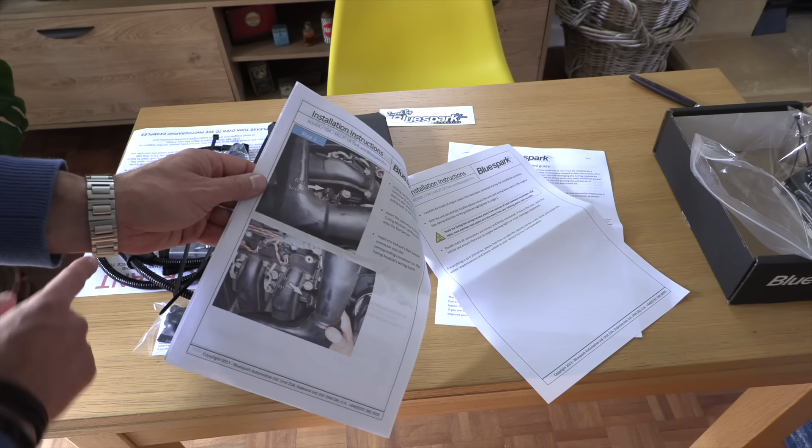Then there's also a nice sticker there. So the instructions seem pretty clear really - you just got to take off a plastic shield on top of the engine where the air intake is, and then that exposes the plug to the rail sensor, and then you splice in the unit into that. So it should be relatively quick and straightforward.

This is the tuning unit itself, the chip, whatever you want to call it. You've got the connector there, and I think the whole thing stays in the engine bay and is secured with those tie wraps. Would have been useful if they put a picture of the unit actually installed in the engine, but they haven't done that. The tuning module itself looks really well made - looks like that's aluminium, slightly milled as a heat sink, all nicely put together.

You can tune this, so you can have it biased towards more power or more fuel economy. In theory, it should bring both, depending on how far you go one way or the other. It is currently in its middle setting. To change that, you have to open it up and then move a little plug. There's instructions for that as well.

I'm going to keep it in that middle setting, which is supposed to be the sweet spot for more economy and more power. There are cheaper modules on eBay, but obviously you can see this is very well thought out, and the feedback I've seen is that these are decent products. It also comes with a little pouch, which I think is to keep the unit in and protect it a little bit when you strap it inside the engine bay.

Right everybody, it's time to see if this is going to work or not. So I am in Brize Norton at the pit stop. They've got a rolling road. The guys generally do classic cars, tuning and stuff like that, and work on them generally. We're going to do a run, first of all, without the tuning module. Then I'm going to fit the tuning module and see what difference it makes. So first of all, the run without the module.

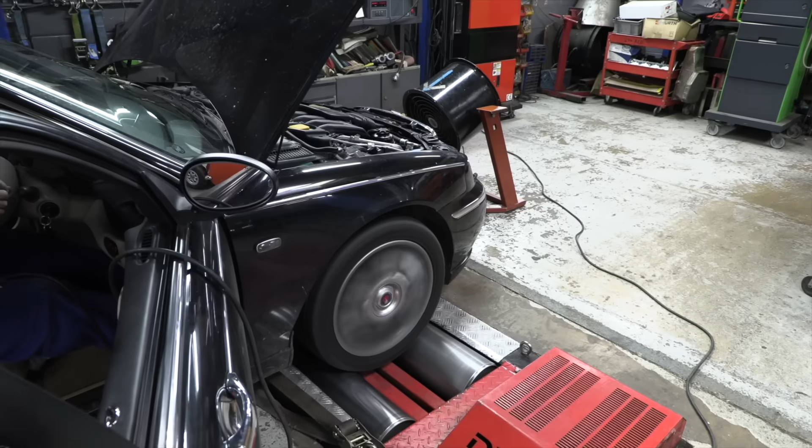So we've done the first run, and it took a little bit of fiddling from the guys to do, because with the auto gearbox it's really, really hard to get a decent, reliable reading, but they managed it in the end, and it was really interesting to see that it's putting out 131 horsepower, which is great - that's what it's supposed to be. I was expecting a lower figure. I mean, this has 75, is it 85,000 miles on it? But that's fine, and it's now time to fit the module.

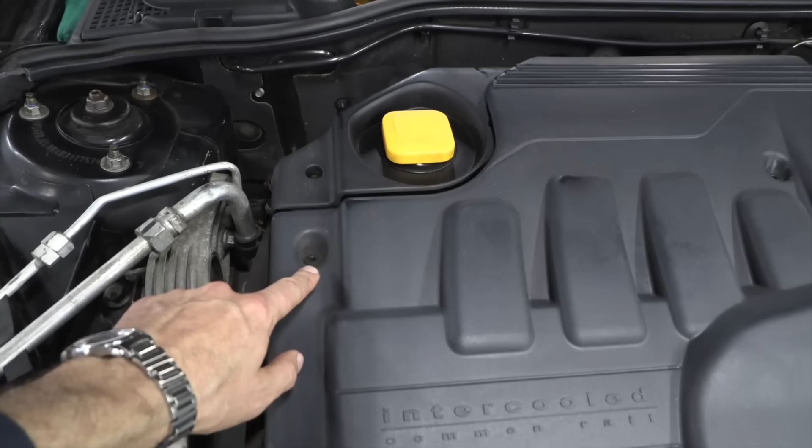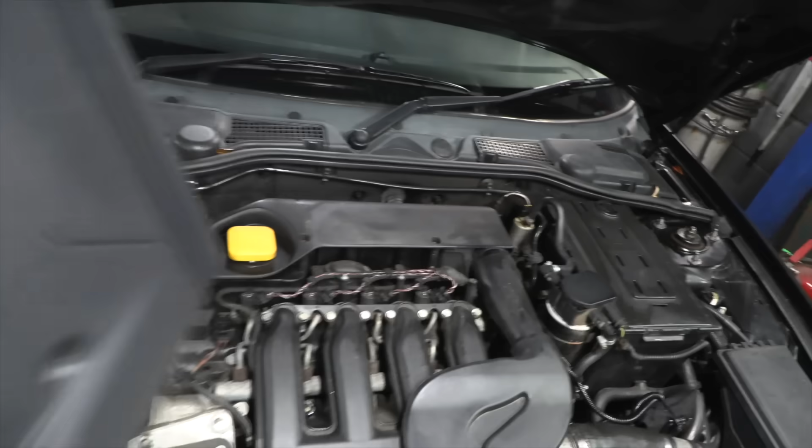For that, essentially, you just got to take the shroud off the top of the engine - it's 3 8mm bolts to take out. They take off the shroud, put in the new harness with the chip itself. You can see it fitted now already here. I've done it, and it literally took 5 minutes to do. The only thing is try and work out where you're going to strap the module to. But let's see what it does with this run.

When I first got here and explained to Ralph, who runs the place, what we were trying to do, he was quite sceptical that the module was going to be making much difference. And he was also gobsmacked.

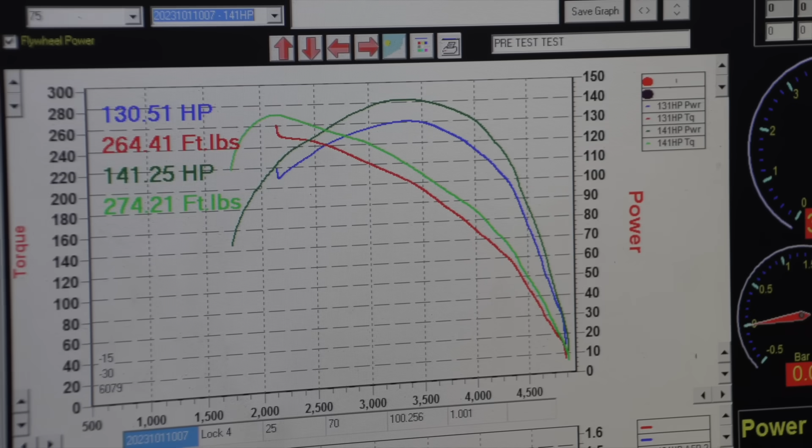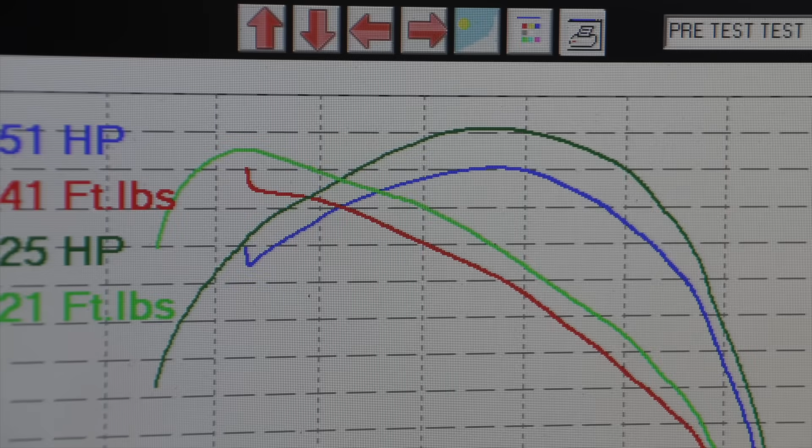We've got the readings here, and the peak figures tell you a little bit, but they don't tell you the whole story. But even on peak figures, it's gone from 130 up to 141 horsepower, and from 264 foot-pounds of torque, it's gone up to 274. What really tells you the story is the difference between the dark blue and dark green curves, and the distance between the two from the lower revs.

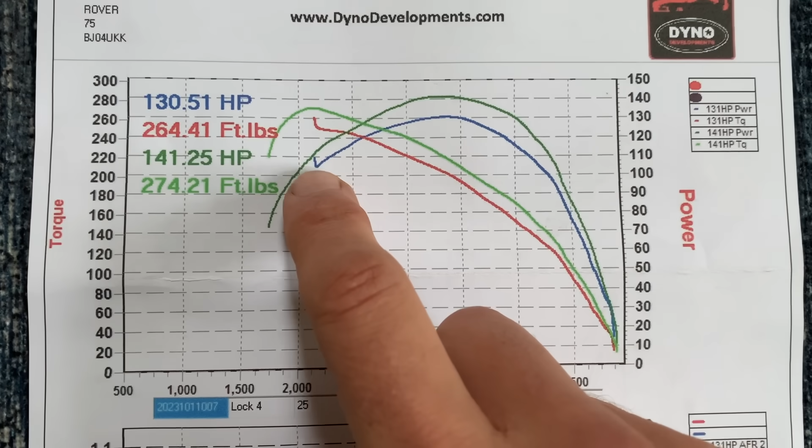There's a little squiggle at the beginning, that's to do with the auto gearbox, so ignore that - it's the bottom of the squiggle where essentially we're measuring from. You can see that both in the horsepower, but especially in the torque, the curves remain the same, but they're just higher throughout the rev range. So Ralph says it's going to make a massive difference, he thinks.

What we're going to do now is go out with the GoPros, and I can tell you how it feels underfoot. But so far, it's looking very, very promising, like it really has made quite a big difference.

I've driven it around a little bit already, and the differences are quite notable. I'm just going to take you through it. This car with this engine tends to stick more or less with the auto gearbox around 1500 to 2000 RPM for a lot of the time. It always felt a little bit asthmatic, pulling away, and now it immediately just feels like a nicer car to drive. So on this little road, I'm doing 40 to 50 miles an hour, and within that range, it's simply much more responsive.

I think it's in 3rd gear here, and it seems to be more willing to pick up, and I don't know if I'm imagining this or not, but it does seem to be going through the gears a lot quicker. So when you're pulling away and so on, it doesn't hold onto the gears as long and moves up a gear.

Which I think would tally with what Bluespark have told me, which is that the way you get more power through this, but also better economy, which was what I found quite odd, is that because there's more power low down, the gearbox, even an auto gearbox like this, will go into the higher gears quicker, therefore you're using less revs.

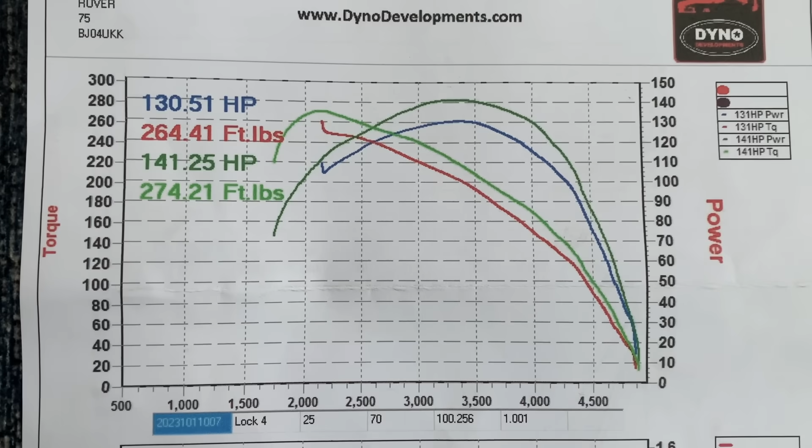The bit where I think, personally, it has gained the most, which is between 1500 and 2000 RPM, we can't unfortunately show you because the gearbox was kicking down. But if you look at the shape of the torque curves, ignoring that initial squiggle on the first run which isn't representative, you can see that there would have been a sizable gain in that rev range, 1500 to 2000.

So on the whole, I think this is a very worthy thing. Very happy with it. Big thanks to the guys at Pit Stop for doing this, and bearing with me.